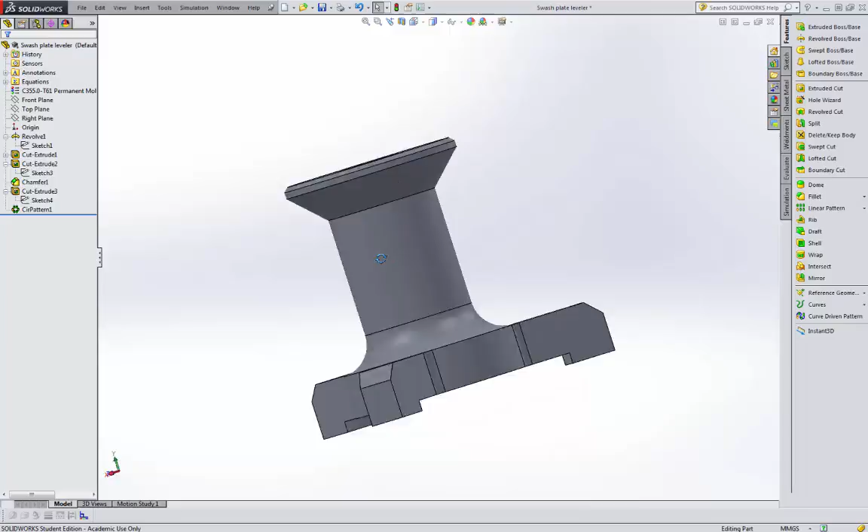So with SolidWorks, I've just whipped up this little thing here. It's not created to any particular scale or anything. I was having a look on the net for ideas of what to do for you, and it's called a swash plate leveler. I've added the holes into it because I want to show you how to dimension for a PCD, or how you can manipulate the drawing to do that.

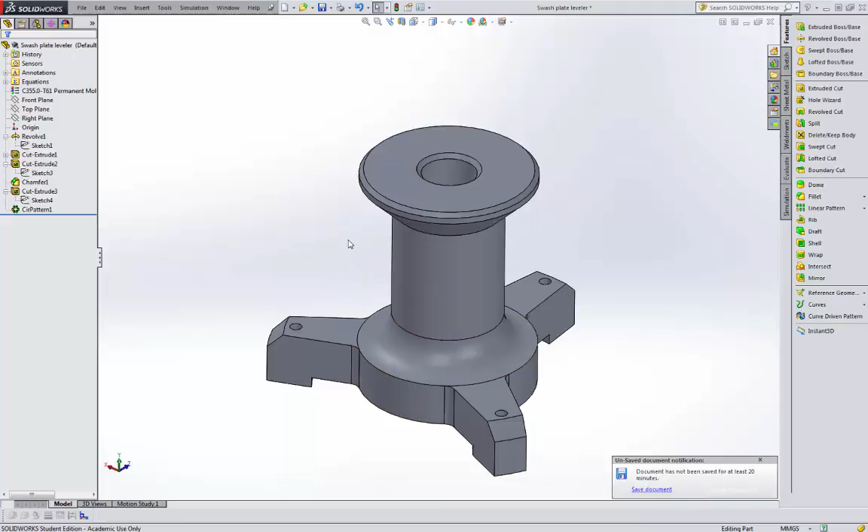So that's just a part that we put together. I used a revolve sketch for the basis of that, then cut the rest of it out and put some chamfers in a circular pattern. It might look a little bit weird, but it's pretty simple once you get into it. You can see from here the history: there's the revolve, cut through the middle, and cut out of that profile. Even if we roll it back, you can see how we made it.

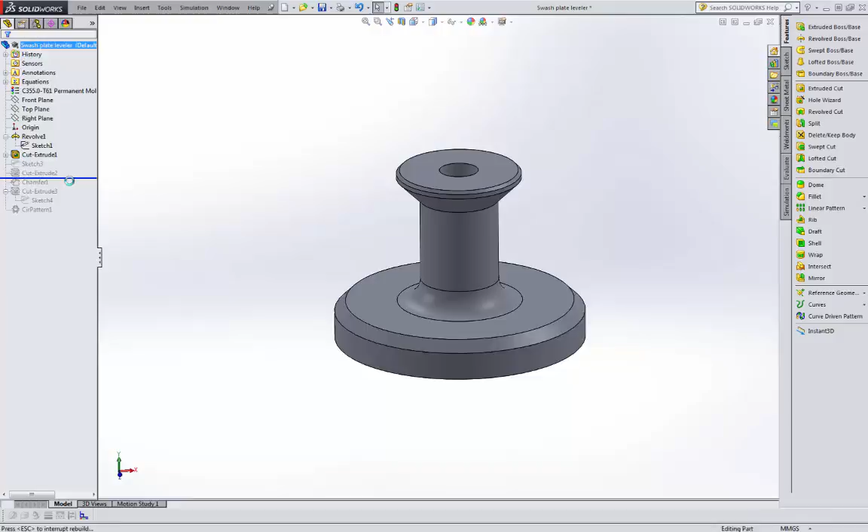And then put the hole in, which I could actually do at the base sketch at the revolve level, just by offsetting it from the centre. And cutting that out, putting the chamfer in, putting one hole in, and creating a circular pattern to put the others in. So that was just very briefly how that's done.

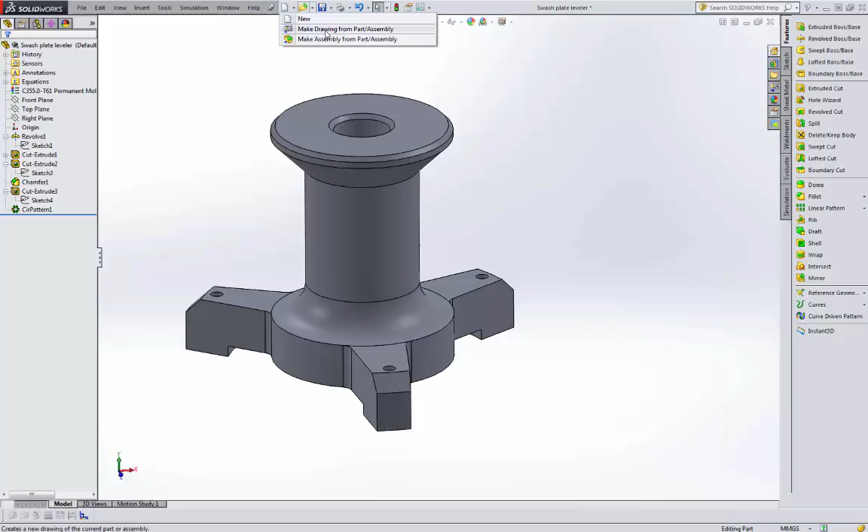We want to create a drawing of this, so we come up here to the button for making new. You can create a new part, but we can also make a drawing from the part or assembly. So if we click on that, OK on that screen, we get some options here. It's an A4 sheet; you've got A3, A2 and so on. We're going to go for the A4 ISO sheet, the standard drawing format.

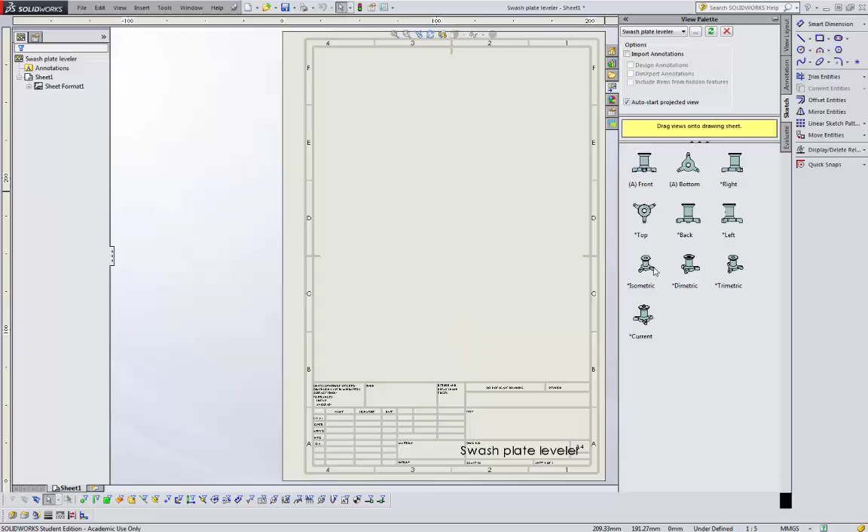If you just want a blank page, you can turn off the display sheet format, and you'll get rid of all the title block and borders. We OK that. So there's our sheet, and now we've got the option of what views we want to put in and how we create them. Very simply, click on it with your left mouse button and drag it into the drawing area.

Let it go. Now without doing anything else, just by moving your mouse, we can create the plan, an under elevation there, an auxiliary view, and side views. Being a fairly symmetrical product, it's not worth creating too many more.

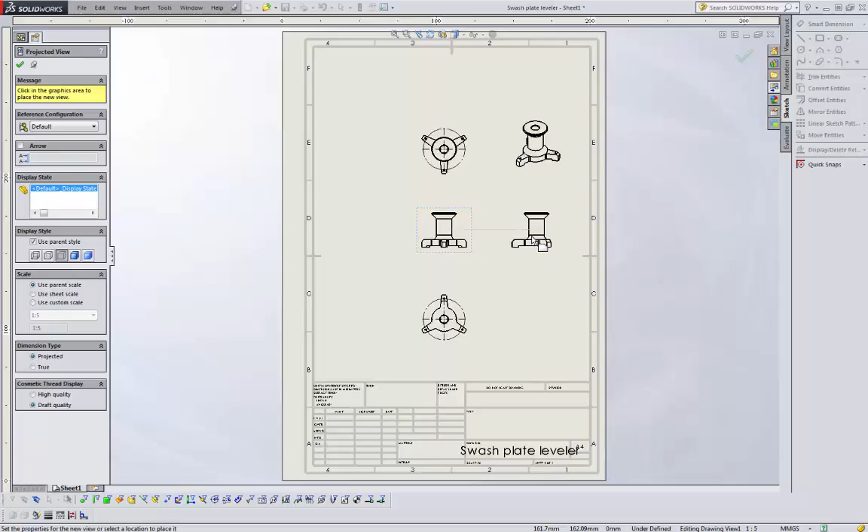We're just going to get confused. So just going to do that. So escape to get out of it, so you're not dropping in any more views. And the auxiliary view, you can move around and sort of place it.

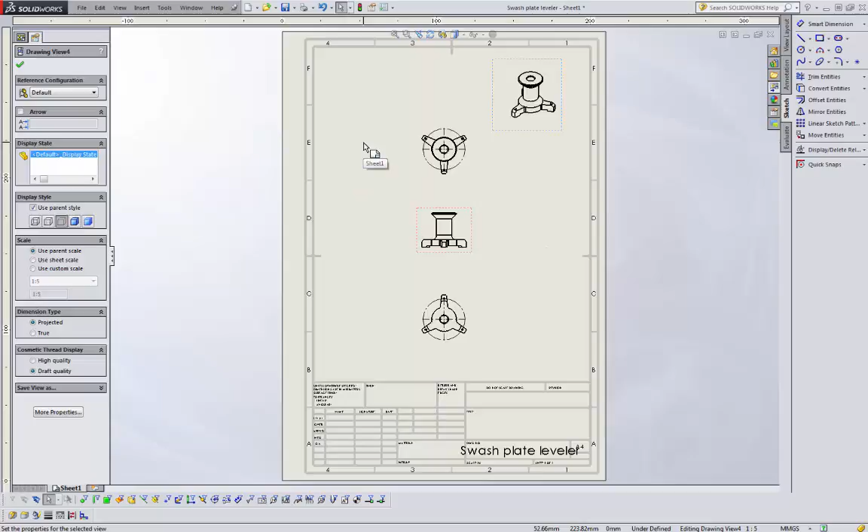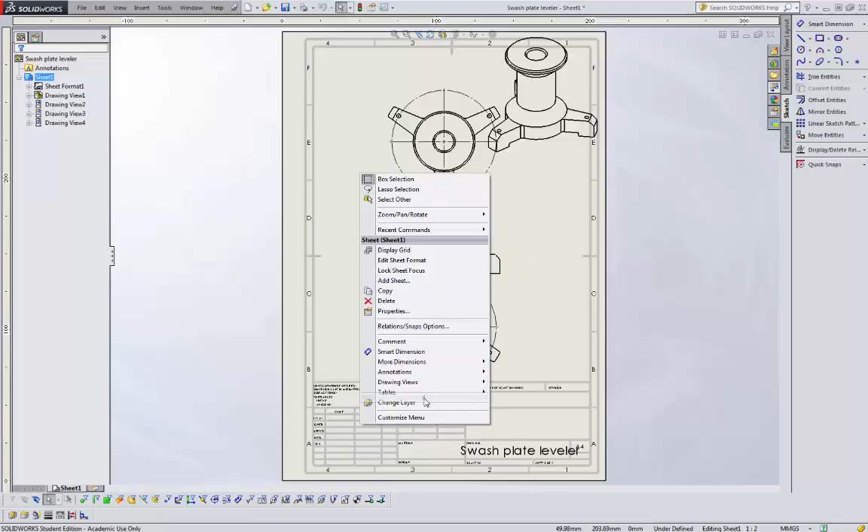One thing you'll have noticed here is that it is a little bit small laid out in the A4 sheet, so we can change that by right clicking, and just down here where the arrow is, if you click those double arrows, it'll give us some more options, and we can select properties, and we can actually now change it to an A3, and if we want to, we can now change the scale as well. So let's change it to half scale, 1 to 2, and go OK. Go through. Just probably didn't like me trying to change too many things at once.

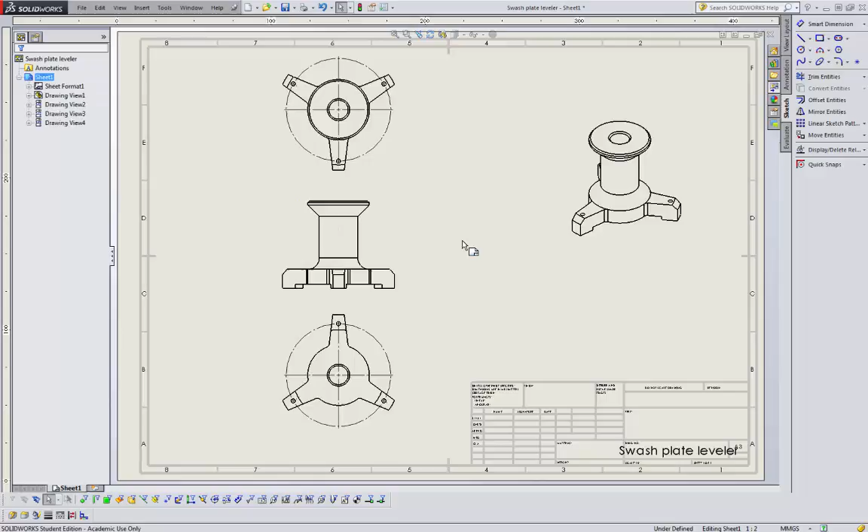So now we can drag that view over there, and we can drag those over and look like that. So because the extra views up here were created from this main one, when we drag the main one, they all go with it. If you try and do that, it won't do on the top one, but we do have the opportunity of moving it vertically. So just get it so that it looks nicely centered. Visually it looks really good, something that you're going to be proud of, and we're going to have some room for fitting the dimensions and things on without too much drama.

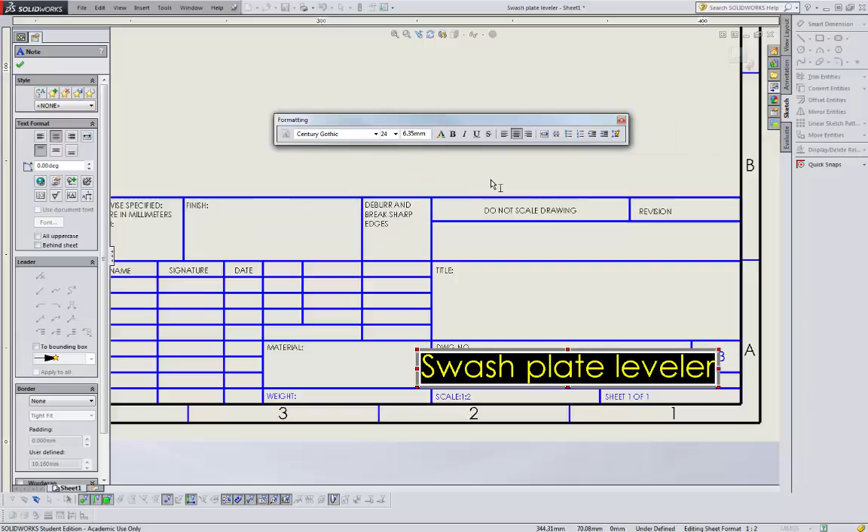One of the other things that you'll notice down here is that the text is a little bit too big. We can change that to fit into the title block because that doesn't look right. So by going right click, edit sheet format, and if you double click on the text, it comes up, and what you'll have coming up on your screen also is a chance to change it. So if we say make that 18, yeah, that's filling there quite well. Click away from the area, and then right click again and just go edit sheet, and that will turn that editing function off, and the text looks a lot smarter.

For creating diameters, it's quite simple. So you can come up here and click on Smart Dimension, or what I've got used to over the years is just right clicking and coming down to Smart Dimension there. So we can do the hole. Now if you bring it straight out, you get the option of it like that, or if you bring your mouse up a bit, you get the leader line to look like that. So we can also do that feature there, and we can do the body diameter as well. Just rotate those around.

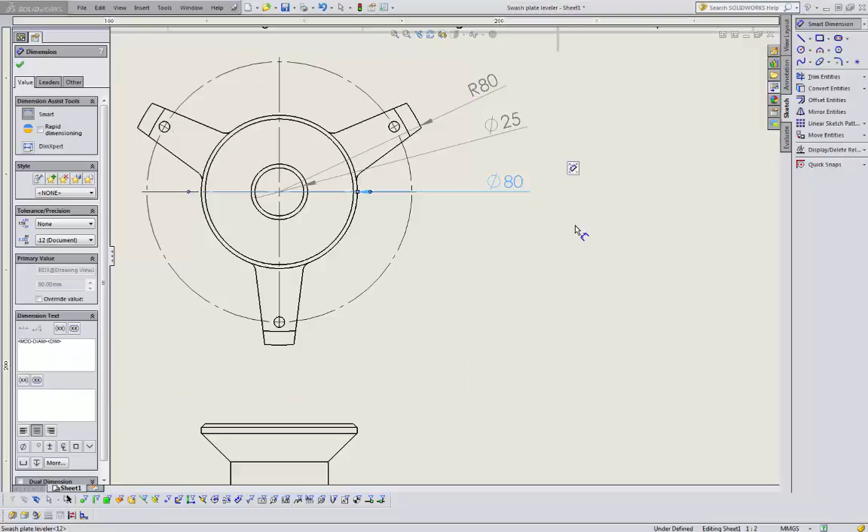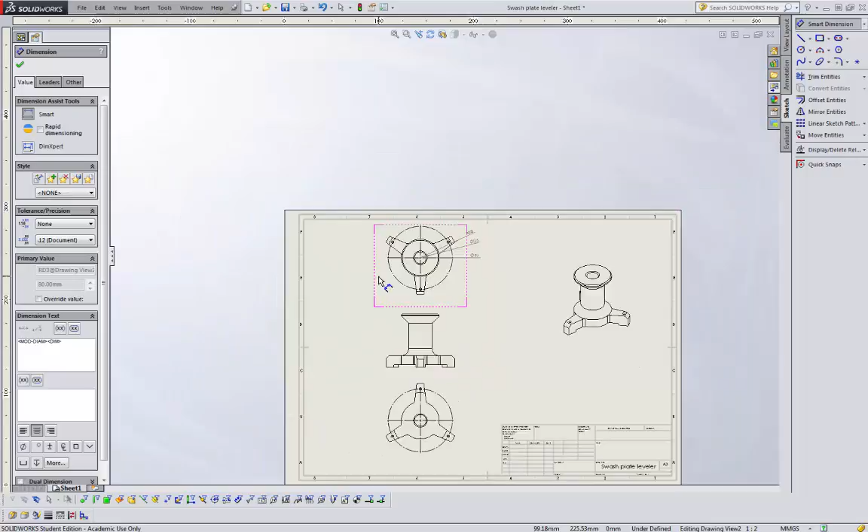The other thing that we have here is the PCD for the holes. So we can dimension the construction line as well, but you see how the cursor changes. You can dimension the hole, but it will start to look a bit cluttered if we start to do too much over this side. So what we could potentially do is, let's dimension the hole, and you can see again, if we come out horizontally it goes like that, or if we just move it off the horizontal, we get it like that. So I'm going to bring it out quite a ways.

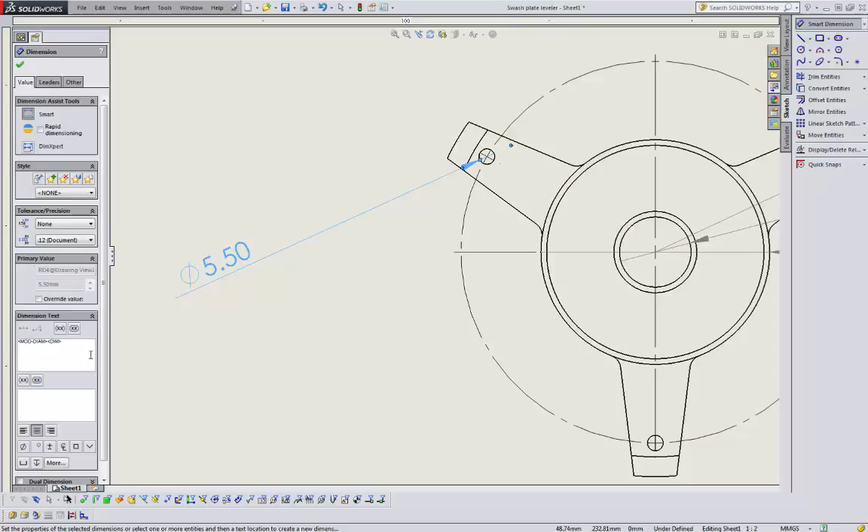Now this is where I want to show you the dimensioning and how we can modify the text a bit. Over here on the left hand side in this dimension property manager, it's got the code that SolidWorks has put in for creating the diameter that was generated off that hole. If we left click into the area just after that, we can go diameter 5.5, and then we can do 3 places on a, and we're going to talk about the PCD.

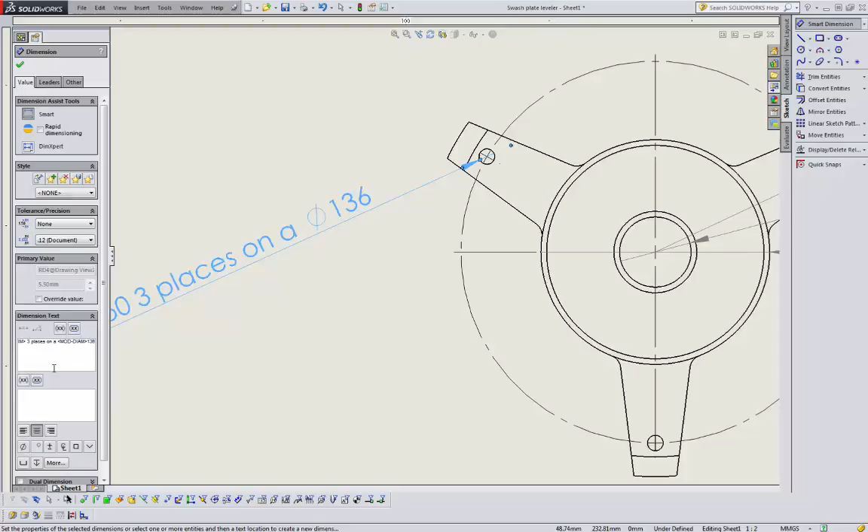So here we want the diameter symbol to be in, so we can come down and click on diameter and carry on, diameter 136 PCD, pitch circle diameter, and then left click out of the area. So we've modified that text, giving more detail on what's happening there. So we've got 3 holes, diameter 5.5, 3 places on a 136 diameter PCD.

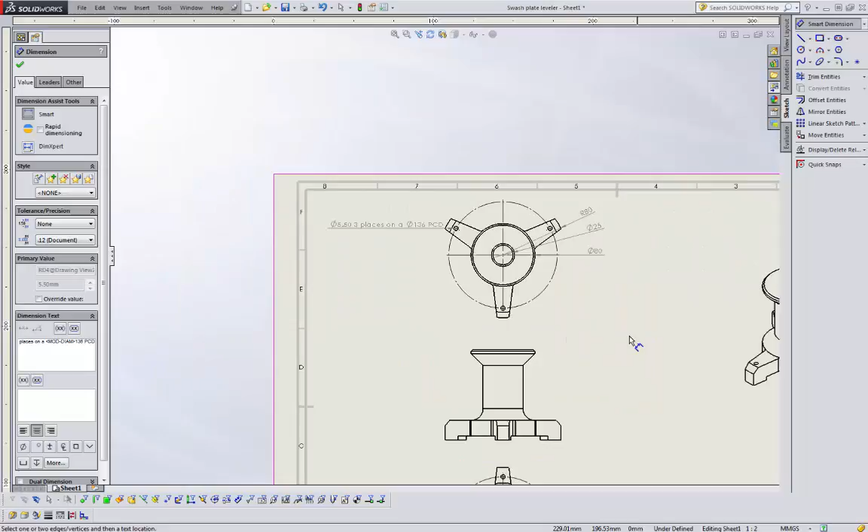Once you've created that, you can move it around if it looks a little bit better there, giving a bit more detail.

If we're wanting to just do vertical dimensions, we can still use Smart Dimension by clicking on the top and then clicking on the opposite side where we want to go, and bring it out. If we're wanting to add thicknesses for the parts of the drawing, we can click and bring them out, and we probably want to know that step.

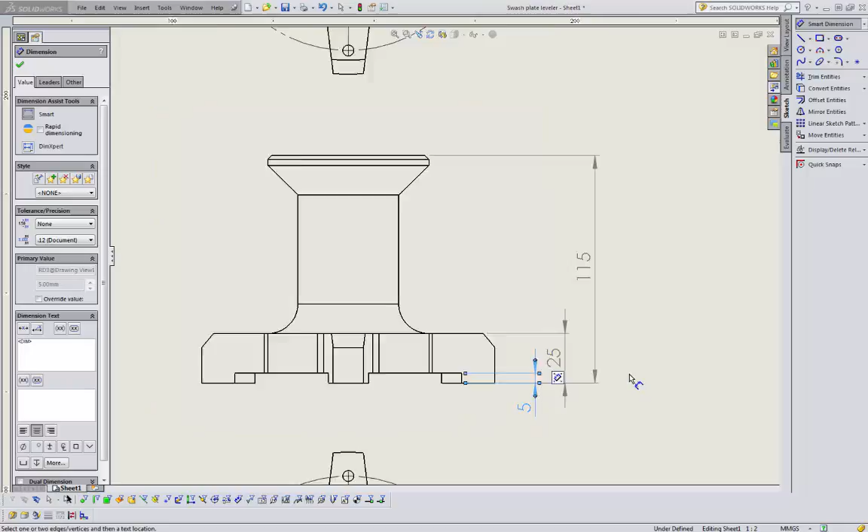One of the things I see quite regularly coming through - escape takes you out of the dimension function - is I'm seeing this kind of thing and this kind of thing. It just looks horrible, messy, and unprofessional.

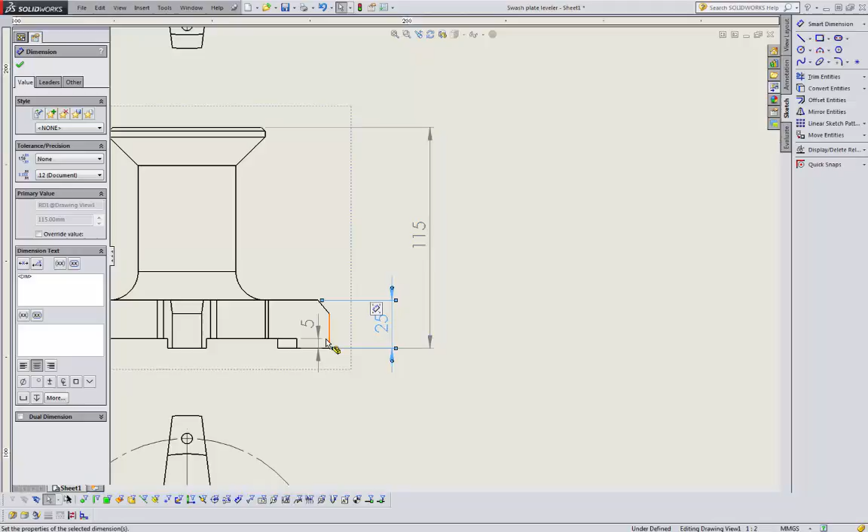So just drag your actual dimensions into the center of the leader, and this one you can bring down and out. We don't actually have room to fit it in there, and that's why I've chosen it like that. All of a sudden that's starting to look a lot sharper.

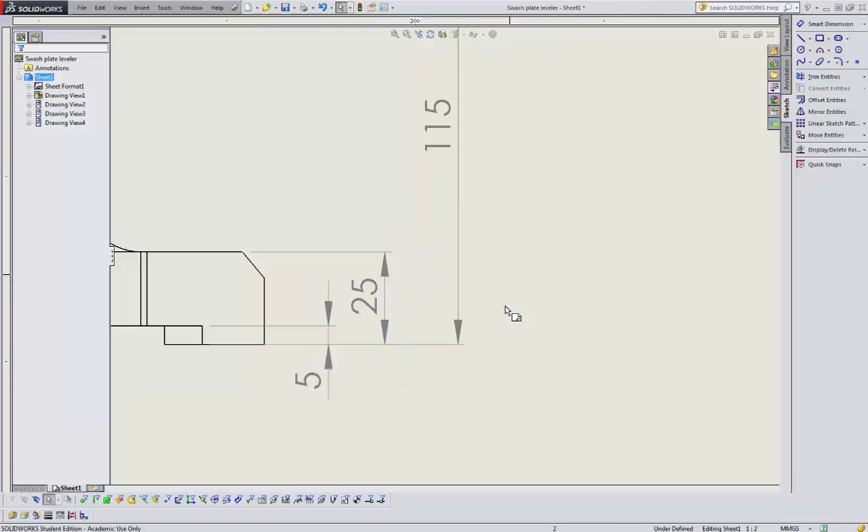Now one of the other things you can do in SolidWorks is if you click on the arrow, at the back here you can see a little circle - if you click on that it brings the arrows to the inside, so you can change which way they go. Already we've started to make that look quite a bit smarter.

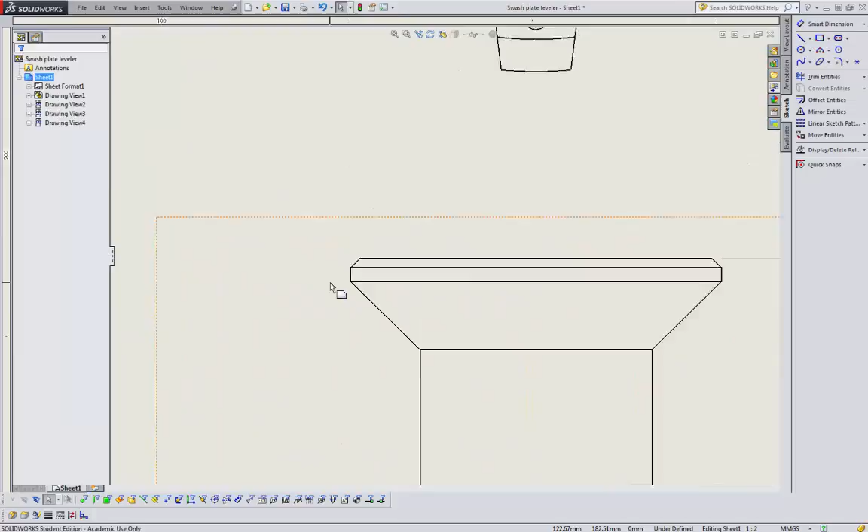The other thing that's a fault I do see coming through is dimensions that are up into the border - that's a no-no. Now we've got a little chamfer that was created on here.

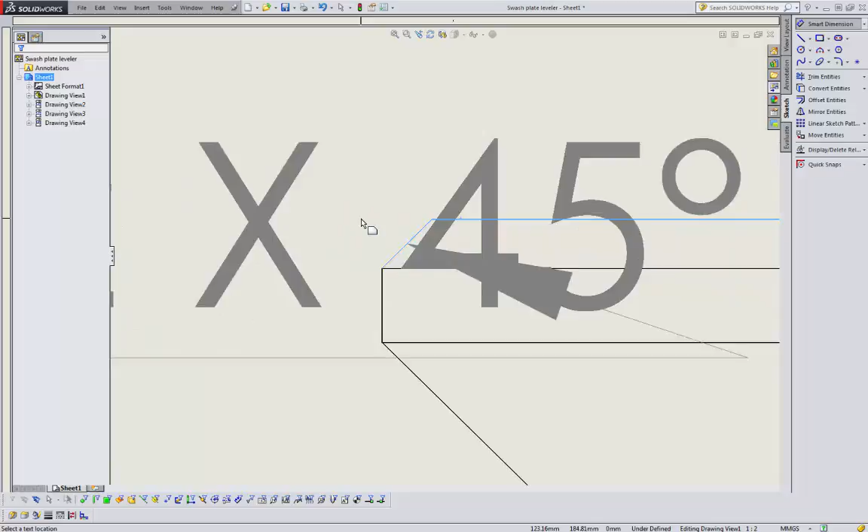If we're in the dimension tool again - I'm used to right clicking it - we can go Smart Dimension or we can go More Dimensions, and drop down to Chamfer. Select that, you'll see it go orange, click on that and click on the opposite one, and all of a sudden you'll see it automatically brings up the designation for a chamfer - so it's a 2 mil chamfer at 45 degrees. That's a much smarter way about it.

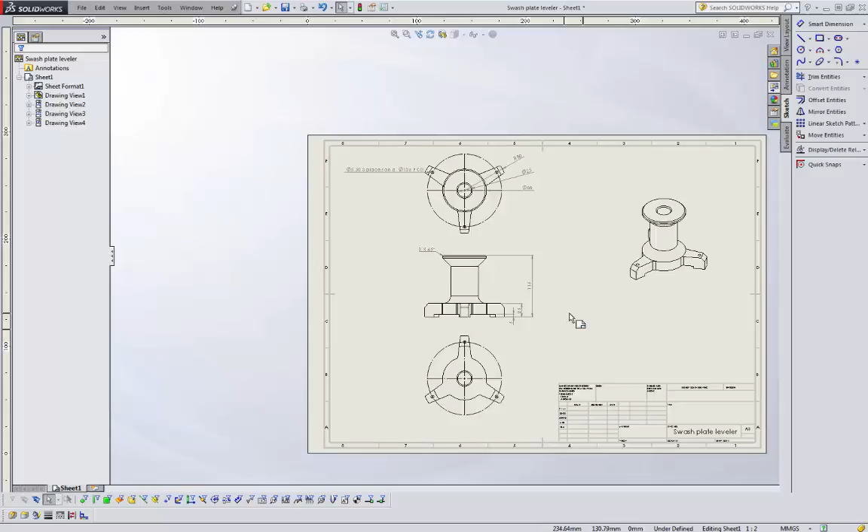That's really probably the key things I wanted to point out. It's not rocket science, it wasn't anything dramatic or difficult, just some of the basics - and some of those simple little tools you're probably not aware of, like how you can manipulate the arrows.

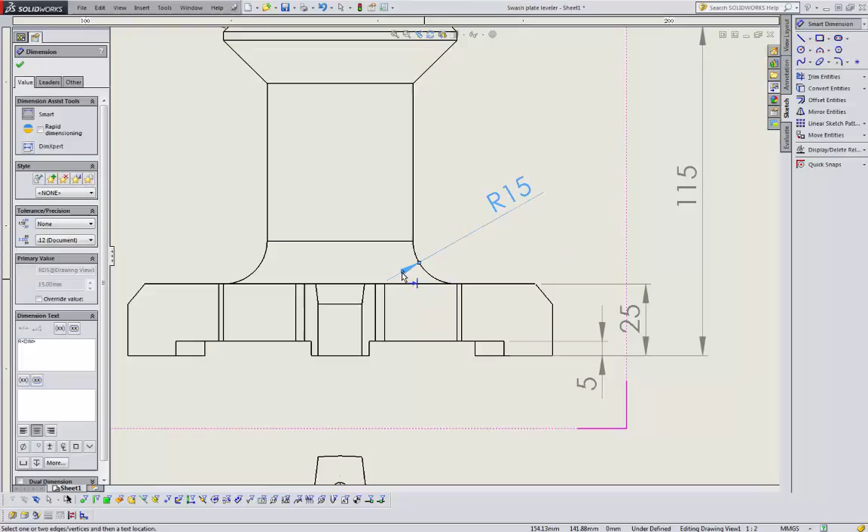So again, if we do this it'll probably bring up - yeah, bingo, exactly what I wanted. We've got a radius in there that we wanted, and if I click on the arrow, it's now got the arrow into there rather than into the part itself, so it looks a lot sharper, a lot smarter. Those are the things I wanted to show you - simple little tips that will help you present a much smarter, tidier looking drawing.

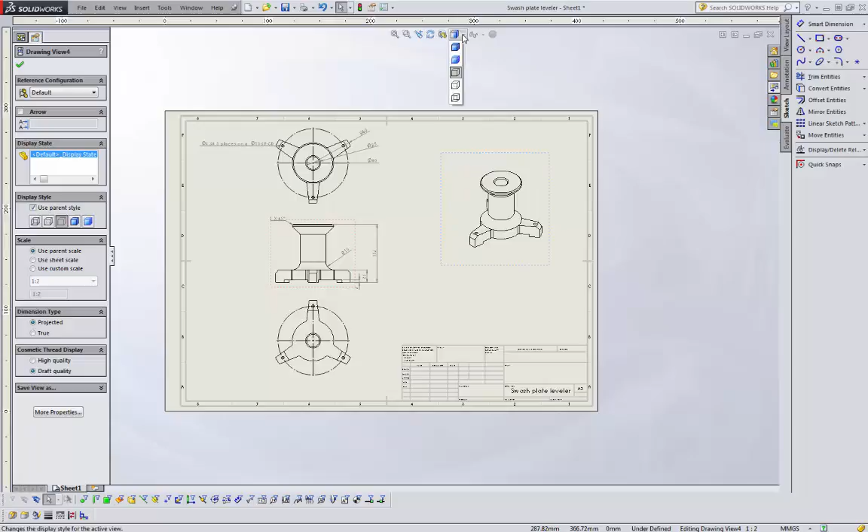One of the other things you can add, if you like, is a little bit more drama - if you left click in the area where the drawing is, you'll get this little dotted bounding box. We can come up here and actually make it solid, like it's the model, the part. That just adds a little bit more bling to your drawing as well.

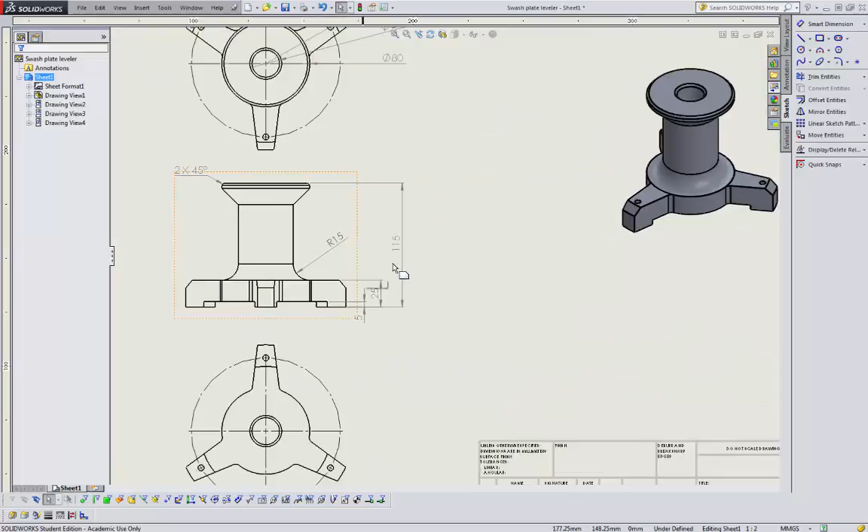Again, if you're not happy with that, if you think it's up a bit too high, you can drag them down, move them around to where you think gives you the nicest view without it being cluttered. All the dimensions obviously are going to be there, and don't forget these little tips, because this can make quite a big difference.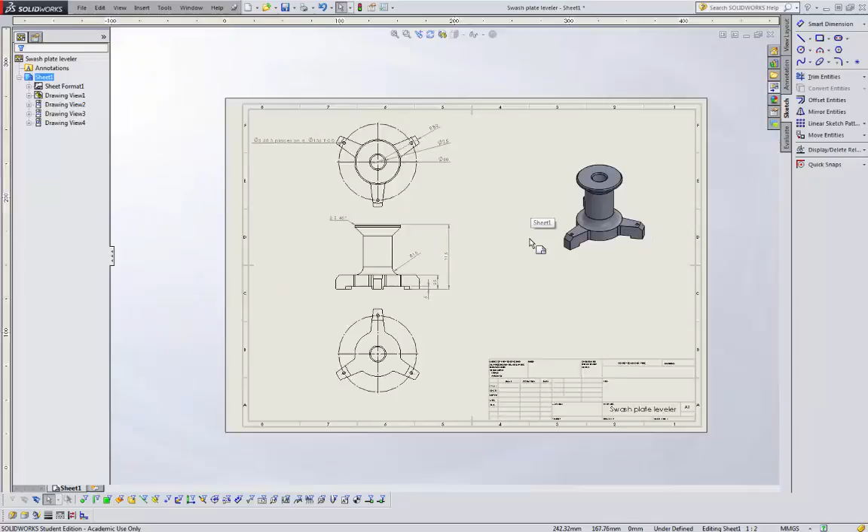If you can imagine that in there, it just looks messy - it's a little bit harder to actually see sometimes what it's actually dimensioning. By bringing it out there, making it bold and clear, it's much tidier. Keep the dimensions centered onto the leader line, and the leader lines of nice even lengths away from the drawing, so it's all clear and a good presentation.